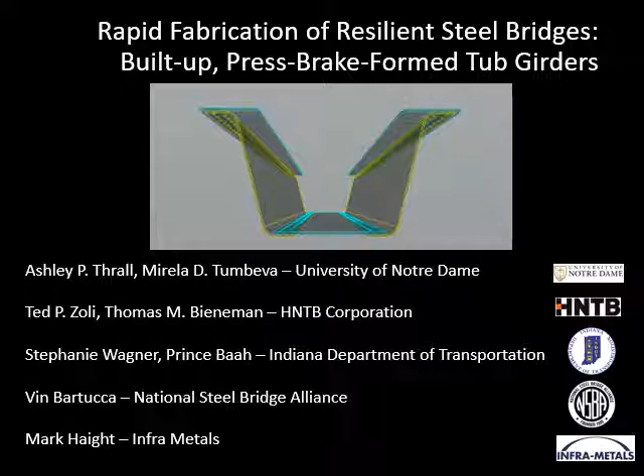My colleagues in this are Dr. Ashley Thrall at University of Notre Dame, our Indianapolis office at HNTB, including Tom Bieneman, Stephanie Wagner and Prince Baah, our Indiana DOT, they're the project sponsors, as well as Vin Bartucca from National Steel Bridge Alliance and Mark Haight from Inframetals.

When we think about accelerated bridge construction, and this is a project we were involved in developing the SHRP2 toolkit for accelerated bridge construction, a hallmark of accelerated bridge construction is doing a whole lot of work without interrupting traffic and then over a long weekend replacing bridges.

This is a corridor in I-84 in New York where we replaced two mainline bridges over a weekend. But what you don't hear about is the 10 or so months of construction it took to prepare for this weekend outage. And so we got very interested in Dr. Thrall's kinetic structures lab, in whether we could dramatically shorten the time it takes to fabricate components.

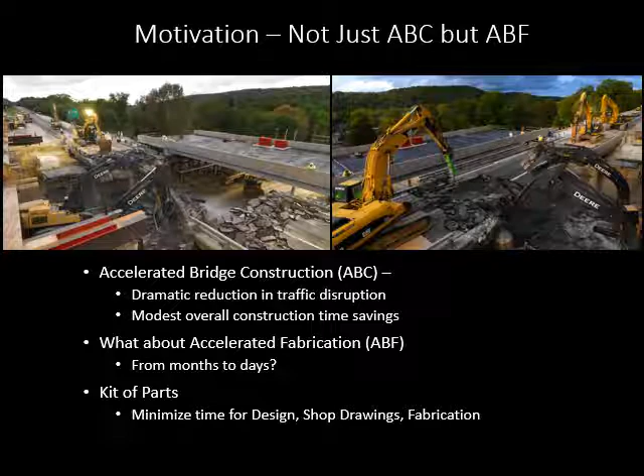So this research is all about maybe not accelerated bridge construction, but accelerated bridge fabrication. Our goal here is to take fabrication, particularly of steel girders, and instead of that taking tens of weeks or months, try to reduce that into a matter of a few days. Because we're interested in streamlining not only the fabrication process but also design and shop drawings, we're using a kit of parts approach.

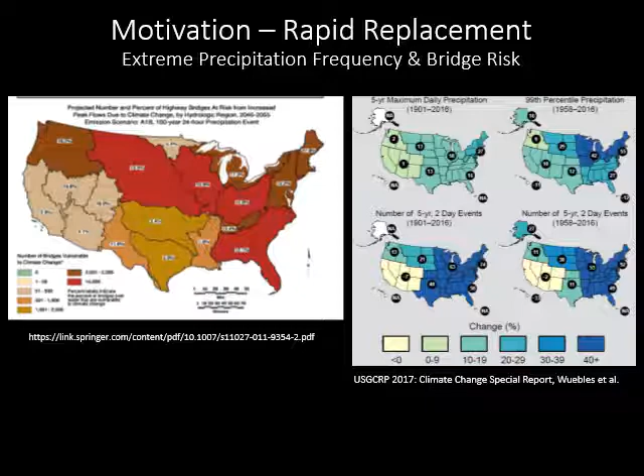In terms of motivation, if we spend some time just talking about climate change and its impact to bridges, there are significant bridges in the Northeast and Midwest part of the United States that are affected from enhanced inland flooding associated with extreme precipitation events. And the numbers are really troublesome. We see anywhere in the neighborhood of 40 to 50% increases in the last 50 years of the 1% or 2% rain events. Inland flooding has become a real problem, not just in places like Indiana where our research is being conducted, but really all throughout the Northeast.

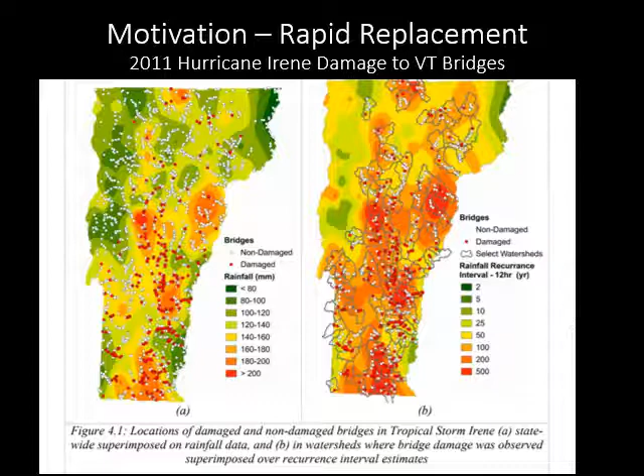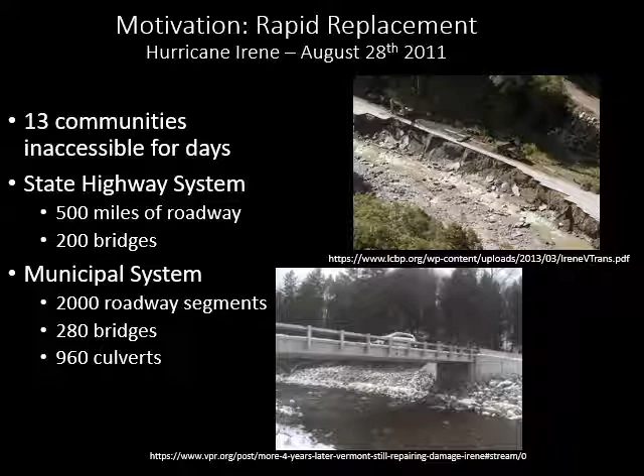So in 2016, you see the challenge that we have - many relatively modest span bridges that take us forever to replace. Can we dramatically enhance our ability to replace these bridges rapidly?

In terms of the research program that we have outlined, and we're roughly halfway through that, it's broken into two parts. One is to investigate the behavior of demonstration bridges that we both design and deploy, and the other part is to develop this design and strategy and kit of parts and a catalog for bridges so that bolted-up tub girder bridges could be used literally anywhere.

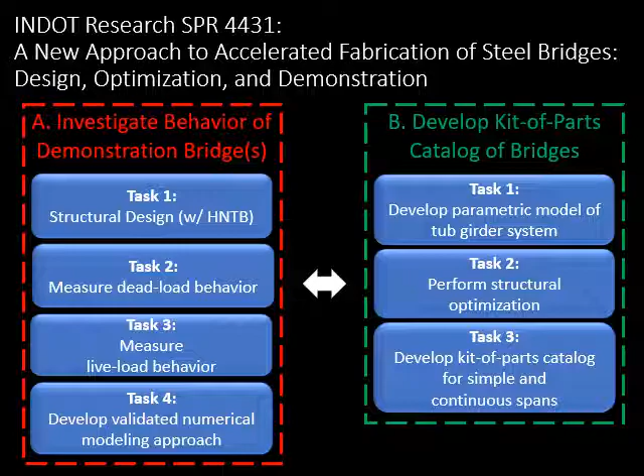So this is a joint project. HNTB is the engineer of record for these tub girder bridges, the two projects we've selected, and working together with Dr. Thrall and her grad students from Notre Dame, we're developing this kit of parts. There's also quite a bit of field work to verify and validate our design methodologies.

We owe a lot to past researchers and their work on using press brake strategies for tub girder projects. There's really two areas of work, both of which are robust, and there's been many deployments of these types of systems. There's a press brake form tub girder, which is more like what you would expect, a trapezoidal shape with a deck on top. And then there's a folded plate steel plate girder tub system, which is actually an open section, but it's - if you will - an upside down U.

Both of these systems have been deployed and are quite effective strategies for bridges with spans on or less than 60 feet, given the limitations. That's typically the maximum length of a brake press, and they're all fabricated out of mill plate. The maximum width of mill plate is typically 120 inches, and this implies span length limitations and also plate thickness limitations.

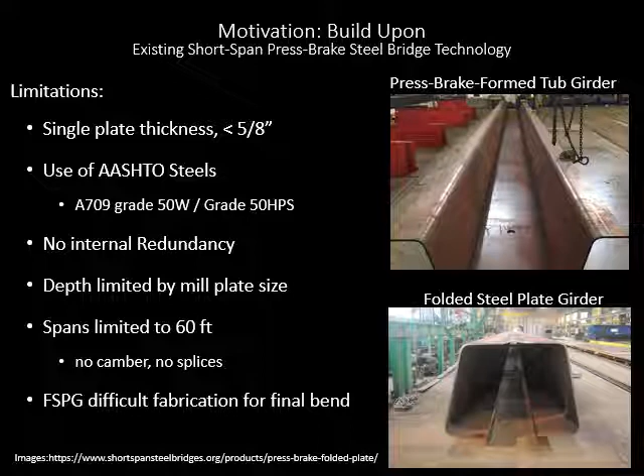Most of these bridges have plate limitations on the order of a half inch or 5/8 of an inch thick. And although that's an important span range with many bridges in it, we're interested in what's more typical of conventional plate girder span ranges, so well north of 100 feet or more.

Our built-up tub girder concept uses only press brake bent webs, and the flanges, both top and bottom, are bolted. Our strategy here is to engage with transmission pole fabricators, and this stemmed from a conversation I had with Inframetal's president Mark Haight at an NSBA conference, looking at what their skill sets were and how we could map them to the bridge problem.

By press braking the webs only, that 120 inches can turn into quite deep girders, so we can have girder depths on the order of 8 feet and span lengths approaching 300 feet. We're still limited by the press brake lengths of 40 or 60 feet, but that's a reasonable transportable segment, and we can assemble these components into longer spans if we want to erect 80-foot or 120-foot segments.

There's no problem—we're simply bolting these segments together before we erect them. So nothing unusual, just the typical sorts of erection, but this strategy keeps everything very readily transportable.

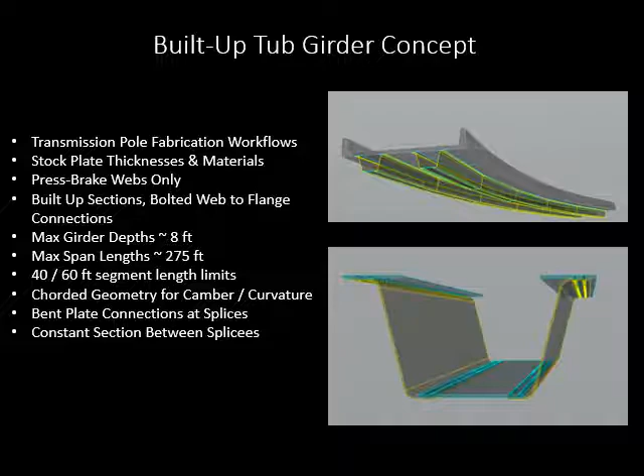We're also only changing cross-section between splices, so this 40 or 60 foot length becomes a very useful way to think about where your section size changes. So this is the strategy.

We're also taking deep advantage of research by others, particularly in terms of redundancy. Purdue has done a really fantastic job establishing how built-up sections are internally redundant. They had quite a time demonstrating even the failure mechanisms with modern steel.

This is a research program looking at bolted cover-plated girders, so you see a clip angle and that bottom flange plate with a through crack, trying to assess whether that crack would propagate into any of the adjacent components, whether it's the web or the clip angles.

They tried like hell, including cooling the entire assembly to -83 degrees to make sure they're on the lower shelf of fracture toughness, driving wedges to force the crack to propagate across the cross-section. And in no circumstances did that crack propagate into any component.

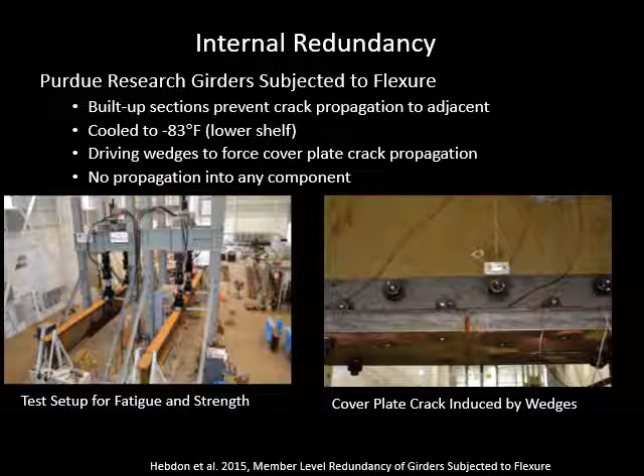This really just highlights how effective internal redundancy is as a strategy. What we did in the riveted girder days probably has a big advantage in terms of overall safety and internal redundancy. So we're taking advantage of that internal redundancy in the design of the press brake tub girders.

In addition, Eric Williamson at UT Austin, with grad students, has also done a significant amount of work looking at the system redundancy of twin tub girder bridges. This is another case of trying everything you could to get these systems to fail.

Not only was the bottom flange cut explosively, which did very little—I think it was 1-inch deflection—but he then cut the webs and supported the span with simulated live load above it, then explosively cut the supports to try to get fracture to propagate. Even then, he got very little deflection, I think 7 inches, but it was fully capable of supporting live load.

It took statically adding 5 times the legal load limit of 363 kips on the bridge to get it to fail. So this just shows you that tub girders, even twin girder systems which we might consider fracture critical, are incredibly capable of load redistribution and redundant behavior.

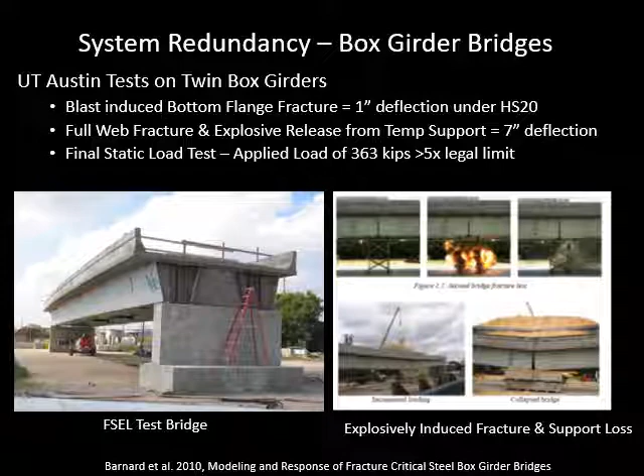So tub girders for us are really a natural choice to get very cost-effective and safe, redundant structural systems. As I mentioned, we've done work in bolted plate connections and bend plate connections.

This was work also done under Dr. Thrall, looking at bolted connections with angle breaks, and you get the idea with chorded sections, whether vertically chorded to get profile or chorded in plan to get curved girder behavior.

Bend plate connections are an important consideration. This work by Evan Gerbo really demonstrated how effective these connections can be and looked in great detail at the behavior of the bend plates themselves. Bend plates are obviously an issue here with using bend plate webs as well as bend plate connections.

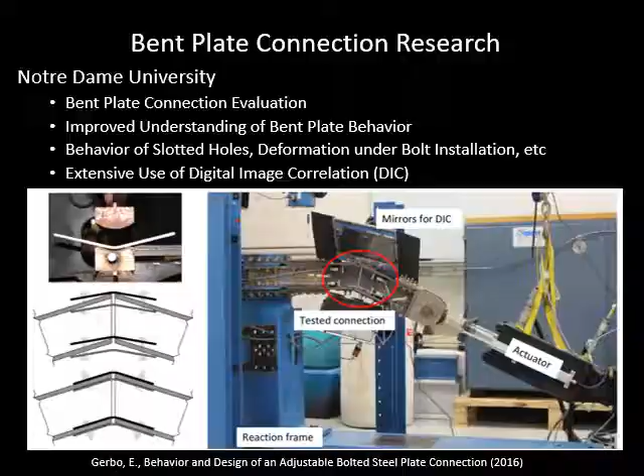So I'll spend a little time talking about plate bending. This is typical press brake bending work, and we've done quite a bit to assess what is happening with the steel from flat plate to bend plate.

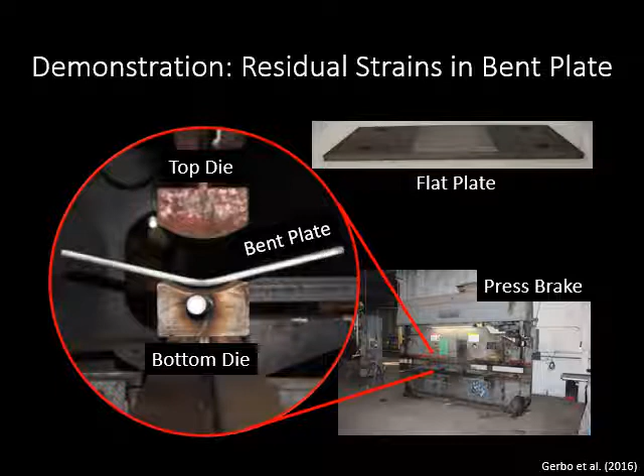In this research, we used digital image correlation. By etching the plate with a pattern, with digital image correlation, which is essentially stereoscopic with two cameras collecting two images, those images are put back together to get 3-dimensional behavior. By patterning each plate, we can accurately calculate the differences between points and then back calculate strains.

So you're seeing here on the left the comparison of digital image correlation of an actual bend plate as compared to a finite element simulation, and obviously we're looking here at plastic strains. We started this program thinking we could use strain gauges, but their ability to survive the press brake was a concern, and we really validated the value of digital image correlation to understand behavior of bend plates.

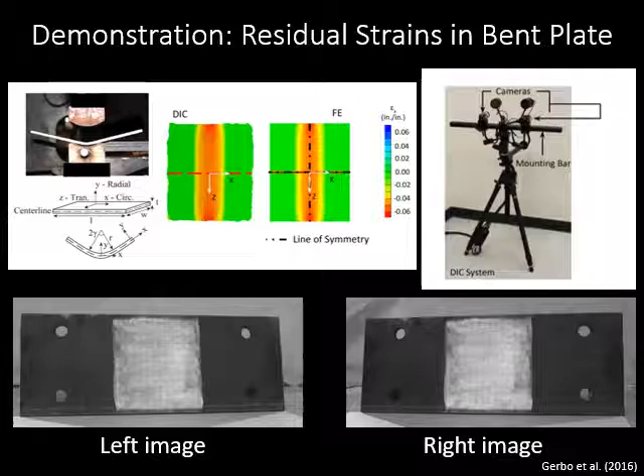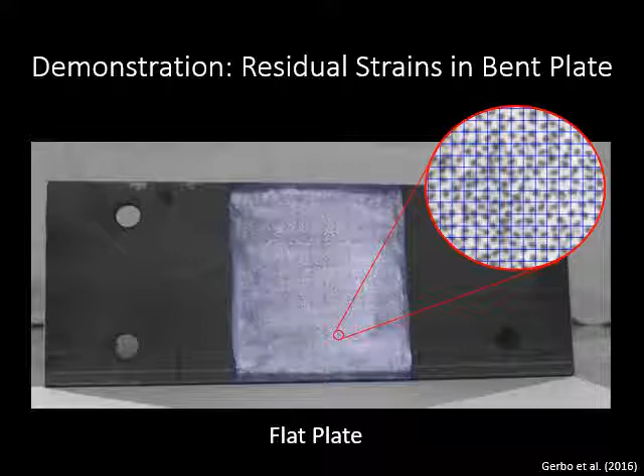This is a close-up of what that image looks like, and the patterning becomes important. So we're either using ellipses that are randomly generated or using squiggles, and we've used this on other projects to be quite effective. These patterns, because they're randomized, let the software tell relative displacement, at the pixel level, from one pixel to the next.

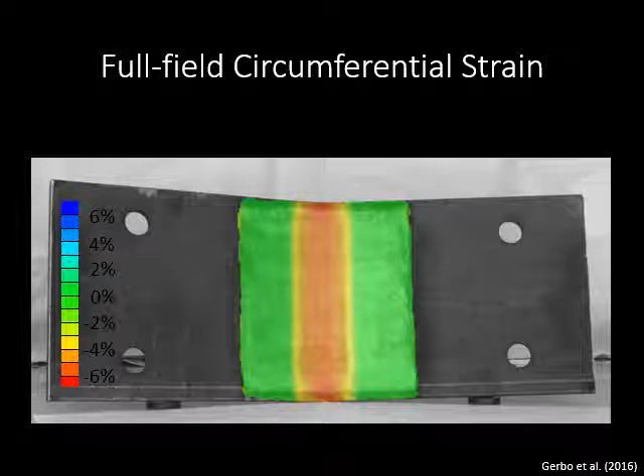So this is an image of the strain profiles as overlaid on the actual bend plate, and you can see fairly significant plastic strains, which are well predicted by equations. We've even accounted for a neutral axis shift and have a pretty good understanding of the way plate bending works with press brakes and what that does in terms of introducing strains into the steels.

We've also taken that digital image correlation on the road and have developed patterning for stickers and applied them to painted steel bridges, demonstrating that it's quite an effective technique in the field.

On the upper left is a truss bridge that had a chord fracture where we used digital image correlation. The right hand one is a cable stay bridge where we can not only see stress profiles but calculate principal strains, getting a sort of finite element overlay of strains over quite a complex system. This is near the tie down of an end floor beam of a cable stay bridge.

And then quite a comprehensive bit of work done for Indiana DOT on the behavior of impacted girders. This is looking at load shedding when an outside girder has been impacted and you get flange deformation, and you've now loaded it with trucks. Where does the load go? Does it go to the interior girders? How much stays in the fascia girder, and does the fascia girder need to be repaired?

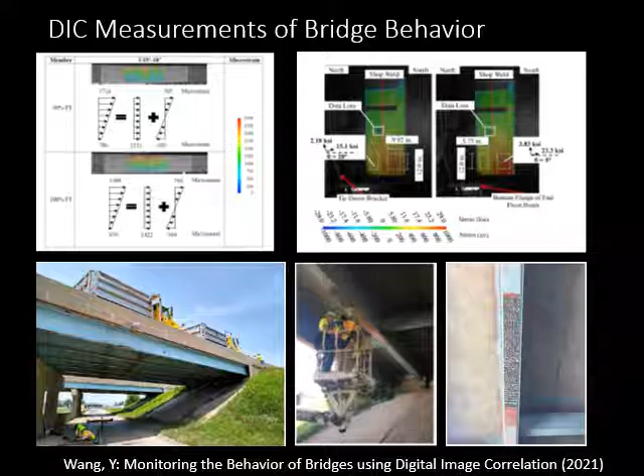All of that technology of using digital image correlation, we're planning to use on our deployed bridges to measure not just behavior under live load, but also behavior under dead load. We will pattern and take photographs of the bridges prior to their being erected, so we'll get what I think will be for the first time both dead load and live load behavior.

Now a bit about those two bridges that are our demonstration projects. One is replacing a 3-span continuous bridge with a 2-span continuous. We want to demonstrate with our technology that we can do continuous systems, and the longest span here is over 100 feet, 105 foot, and 86 feet.

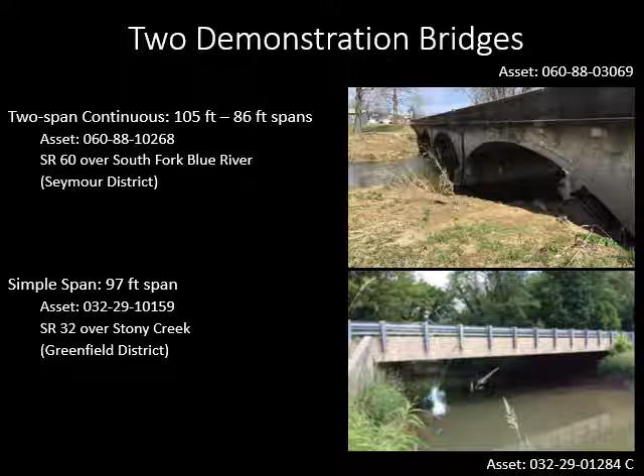And for a simple span bridge, which has, I think, the original bridge about a 72-foot span, we're extending that to 97 feet just to get better hydraulic opening and better abutment behavior. So that's a simple span bridge at nearly 100 feet.

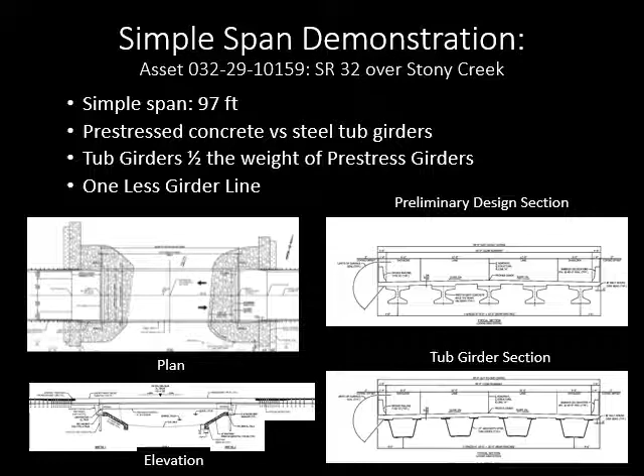So to do a little comparison of before and after, the conceptual design for the bridge was pre-stressed girders. This is a 5-girder system for the simple span, and we're replacing that. Our alternative with tub girders uses a 4-girder cross section, and the girder depths are roughly the same. These are quite shallow depth tub girders, using basically 1-inch steel flanges and 5/8 inch steel press brake bent webs.

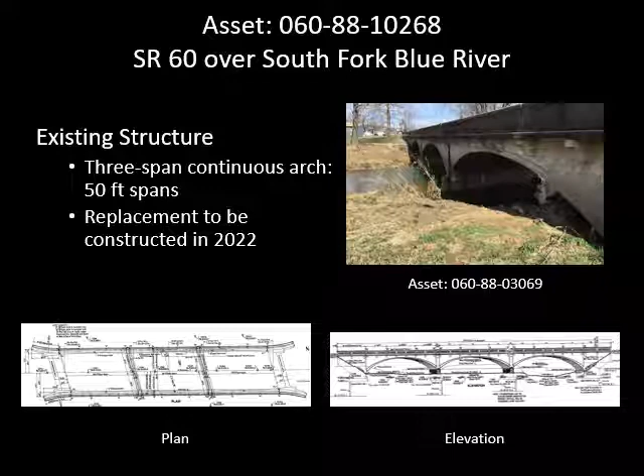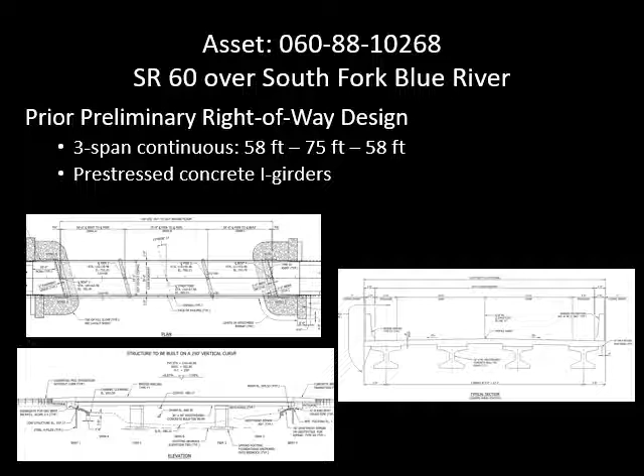For the 3-span continuous, the big advantage of going to tub girders is that we can actually reduce the number of spans. The preliminary design for this was still a 3-span bridge with pre-stressed girders, and our approach is to actually eliminate one of the substructures and reorient so that we have a 2-span continuous, going to tub girders. Now we've eliminated a substructure unit, which is a big advantage because this is also one that's subject to debris accumulation.

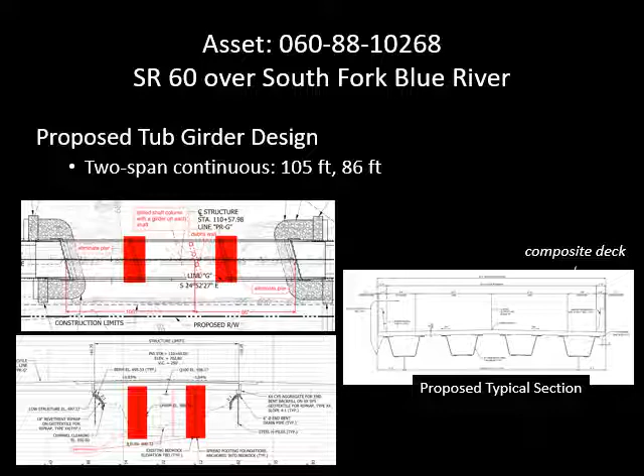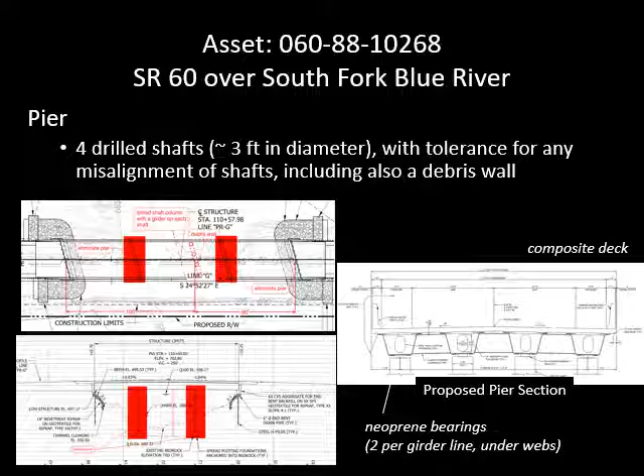So we've got better hydraulic opening, less construction costs associated with substructures, and easier erection. Our proposed substructure is just the extended drilled shafts with shear walls supporting each tub.

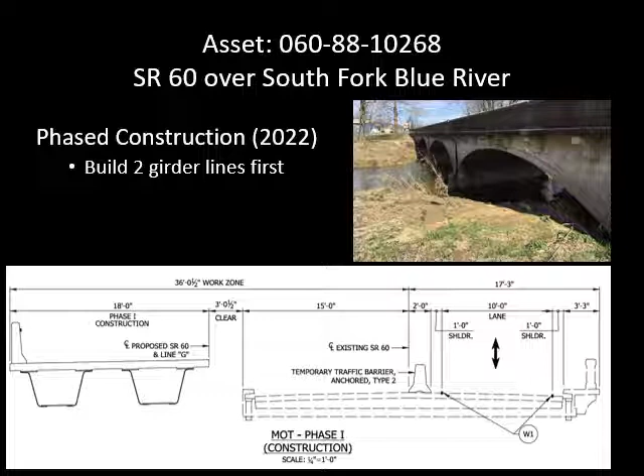This is also staged construction, as many projects are. The construction staging is to build and shift traffic one lane at a time to the new bridge, built in halves. We also want to demonstrate that this technology works in staged construction. Because these are infill arches, for demolition we've left 3 foot clear to make sure that demolition of the existing bridge doesn't get fouled by the new bridge.

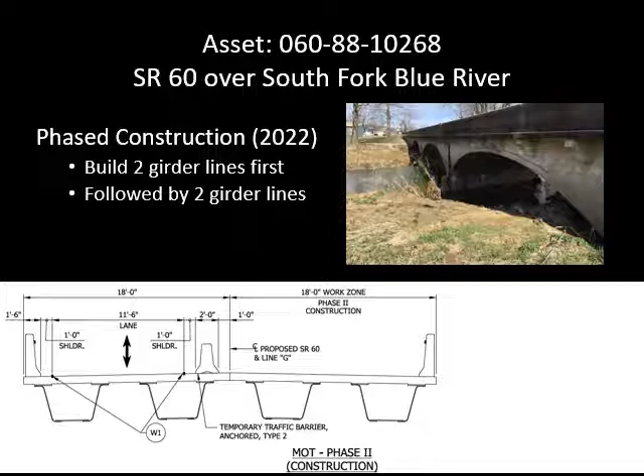So we've got a work zone for complete demolition, and then the second phase construction is connecting the identical span with a longitudinal joint. So as part of this evaluation, we'll also be able to look at load distribution and redistribution through stage construction, which will be quite useful.

The big takeaway here is not just the savings of a pier, but the significant savings associated with lifting activities. The tub girder is roughly half the weight of a similar pre-stressed girder for similar span lengths. So there's a big advantage both by pier elimination, and we've significantly reduced not just the weight of the picks.

We've gone from a 36-ton pick with a 3-span continuous at a 100-foot radius to a less than 30-ton pick at a 50-foot radius. So significant reductions in crane activities, with cranes placed behind the abutment, as well as a reduction in the number of picks. So we see big advantages to transport and erection associated with going to tub girders, and pier elimination is obviously an advantage.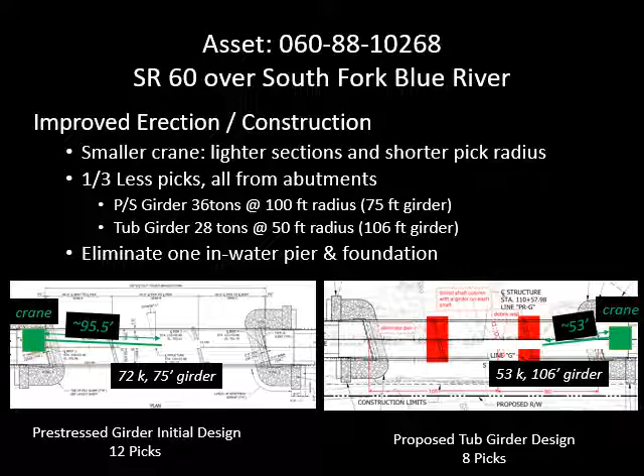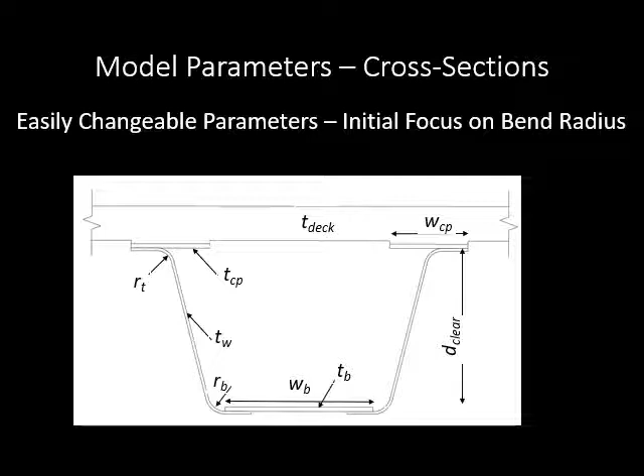As part of the research, in this kit of parts idea, we've developed parameterized models all within Abaqus. Every one of these parameters is something we can change with respect to each individual girder, and also girder spacing, deck thickness, and so on. So the idea is to have a fully parameterized set of FEM models, and then we can do parameter optimization for this development of a kit of parts.

I want to spend a moment talking about press brake bent systems. We're using a press brake to bend steel, and that whole question about what steel should we use and what bending does to steel. So this will be a little bit of an aside.

Part of our motivation was to use workflows associated with transmission pole manufacturing. The more we got into this, with the help of Mark Hayden at Inframetals and some of his staff, we got a better understanding of what steels they use and why, and how they might be a deep advantage for using those steels for our tub girder project.

In particular, they're typically using 65 KSI steels, ASTM A572 grade 65, which is a bridge steel they also use, that's typically galvanized. ASTM 871 is a pole steel that is typically a weathering grade. So there's both weathering grade and normal grade steels that we would be familiar with.

What's fascinating is that their CVNs are specified similarly, 15 foot-pounds, which we would typically specify at 40 degrees Fahrenheit. They're specifying at minus 20 degrees Fahrenheit. It turns out that specifying a minimum Charpy at a much lower temperature is really the right strategy when you're looking at cold working.

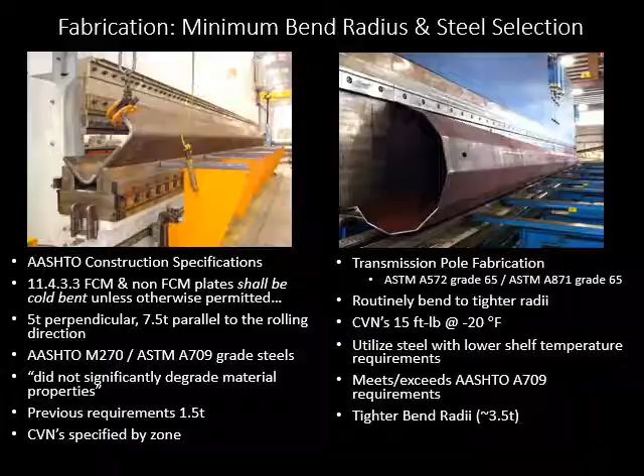So if we talk a little bit about why temperature shift is the right strategy, going back to why we use CVNs, or Charpy V-notch, to get an assessment of toughness — our goal is to make sure that at the operating temperature we're using the steels, we have adequate toughness against crack propagation.

So typically we're testing at lower temperatures, and we're using as a design basis the temperature, the in-service temperature, the lowest in-service temperature.

So for these projects in Indiana and for the Northeast, we're typically talking about Zone 2 Charpy requirements.

This temperature shift not only applies to cold working, as you see in the right-hand graph, but also applies to the toughness of steels depending on loading rate. So this idea of having lower temperature toughness inoculates you against some cold working and also some dynamic force, because the Charpy V-notch is a dynamic test, and typical bridge behavior in terms of strain rates is in the intermediate range, maybe even closer to static. So this 40 foot-pound, the 15 foot-pounds at 40 degrees Fahrenheit has associated with that taking advantage of the fact that we're testing dynamically, and the bridge actually uses more intermediate strain rates, or statically.

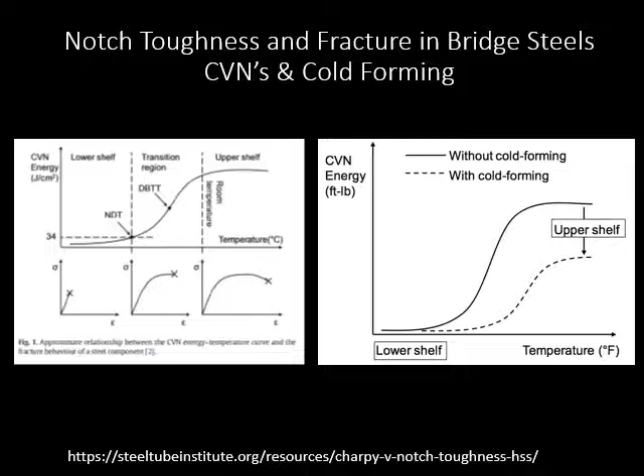So one of the arguments, and this maybe even applies to AASHTO, is that when we cold work steels, we really should be starting with steels that have higher toughness, and not just higher toughness at an operating temperature, but it's better to have higher toughness at lower temperatures because of this temperature shift.

So we've learned a lot about this sort of behavior from roll form structures like steel tubes. HSS, whether rectangular or square tubes, have this problem of a bend radius in the corner, and then typically a weld. These are typically formed by roll forming, and here you see the same temperature shift.

The Eurocode uses a temperature shift as an approach to evaluating the toughness of cold worked steel, and they don't specify cold working, but cold worked steel. Here these are CVNs where the flat is not cold worked on a rectangular or square section, the corner is cold worked, and the black and the red are the difference between the two.

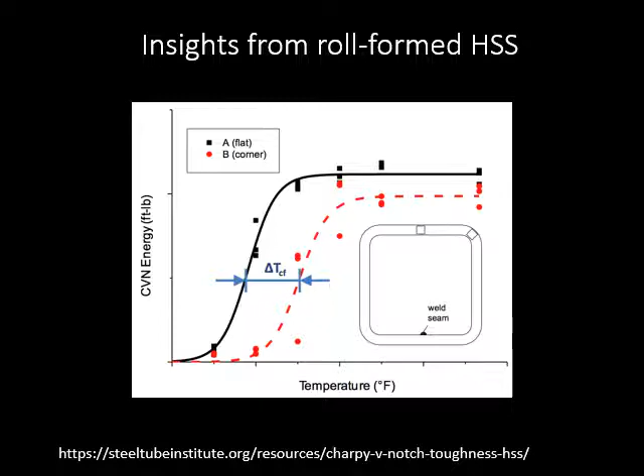So I'm using the same philosophy. We want to start with better toughness so that when we take a temperature shift into account, we end up with better toughness, or with adequate toughness, of the finished product.

In the Eurocode, they use this degree of cold forming, which is associated with plastic strain, but slightly modified. You can see a great correlation with the degree of cold forming. So no cold forming, you start with really good toughness, and as you cold form and strain the steel more plastically, you get reductions in toughness. The idea here is lower strain, less reduction in toughness.

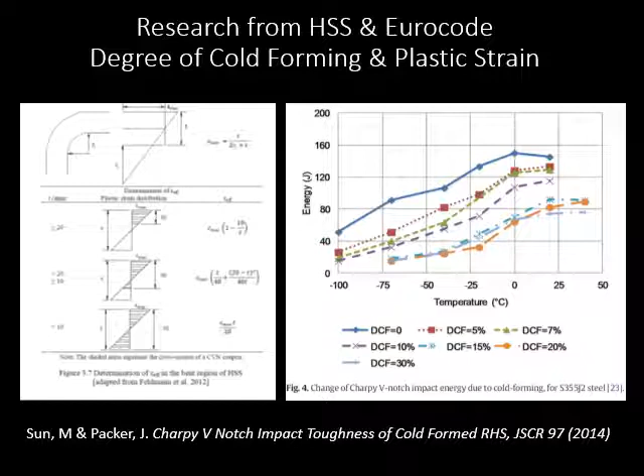So bigger bend radiuses are helpful. But you could also get at the success by starting with better toughness material in the beginning.

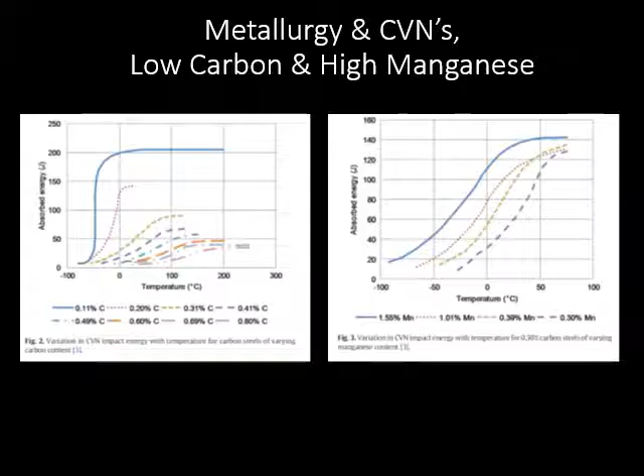That's where I want to head to next. So it turns out also that the lower the carbon content and the higher the manganese content tends to head you in a place where you start with better toughness at colder temperatures. And so the steels developed for the transmission pole business tend to have lower carbon and higher manganese contents.

This is a typical example when we asked Inframetals for a typical example of 5/8 inch plate that we're going to use for our projects. This is what we see. We see CVNs of an average of 100, so 15 would be the minimum at minus 20 degrees Fahrenheit. And if we go through and compare...

Pole steel and this 5T temperature shift, which is permitted by AASHTO, and we compare what we're getting, even meeting the minimums, we find that bending to a tighter radius, this 3.5T, which is typically used in transmission pole fabrication, we're very comfortable. We can meet the AASHTO requirements assuming no cold working.

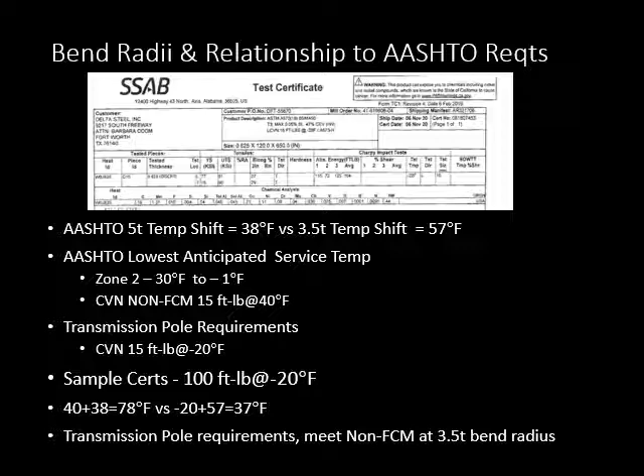So our approach here is, rather than using what I would say are A709 grade 50 materials, to use transmission pole manufacturing materials which are on hand as the basis, and bending them to dies that are typically used in transmission pole fabrication to make sure that we meet our minimum toughness requirements. And we think that this is the right strategy. We're really trying to adapt workflows from transmission pole manufacturers to get new fabricators into the market.

So these are the ASTM A871, which is not a steel we use in bridges, has exactly this 15 foot-pounds at minus 20. And it's interesting, when they use A572 grade 65, which is a steel that doesn't have an ASTM minimum CVN, when they use it for poles, they specify the same absorbed energy. So that's exactly the strategy we have, is to specify minus 20, 15 foot-pounds at minus 20, as the grade of steel or the characteristics of steel we need for our press brake webs.

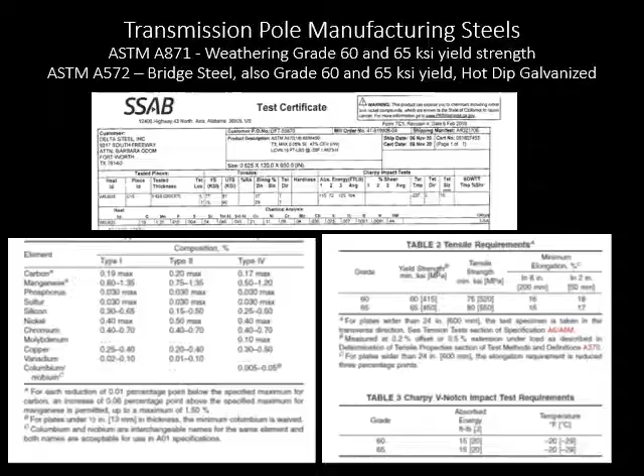Now a bit about the modeling.

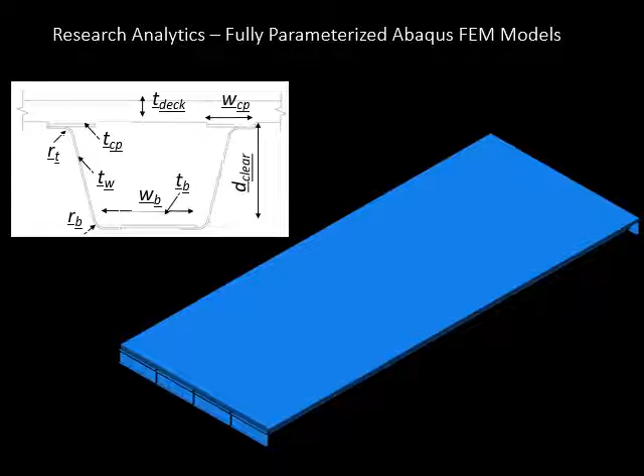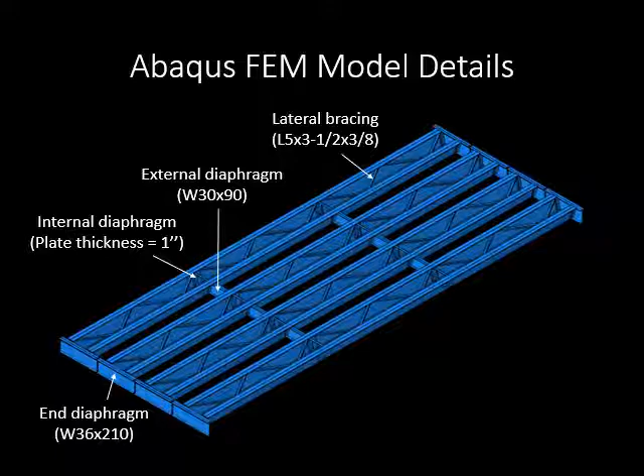As I mentioned, we have everything parameterized. This is some details of the simple span, the 97-foot simple span bridge model. In Abaqus, we have pretty well everything modeled in quite a bit of detail: lateral bracing as angles, connections, end diaphragms, intermediate diaphragms with the openings, even openings in the bottom flange for construction access. Much more sophisticated than what we would do in a typical design office, where in this case we're using CSI Bridge and their

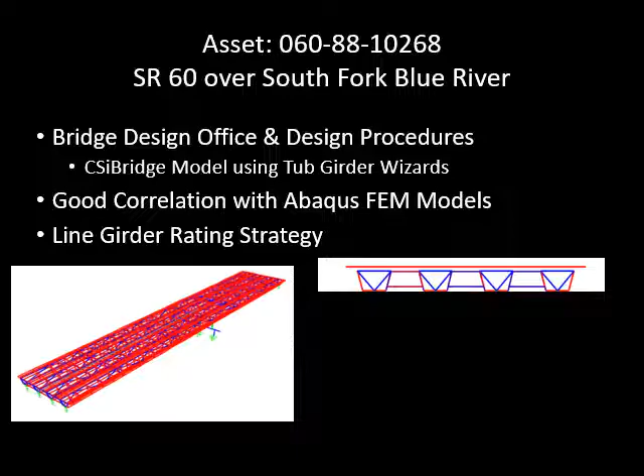tub girder wizard, which we found quite good correlation. So the Abaqus models give us much more detailed assessment of some of the components, but we want to make sure that a typical design office workflow can handle the design of press brake tub girders.

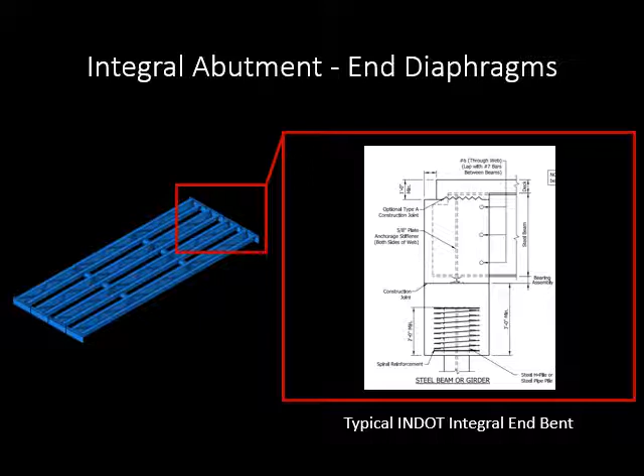Also, we're using Indiana DOT's semi-integral end bent conditions, so we've adapted some of our details to avoid joints and use conventional semi-integral abutment type connections that are common in Indiana.

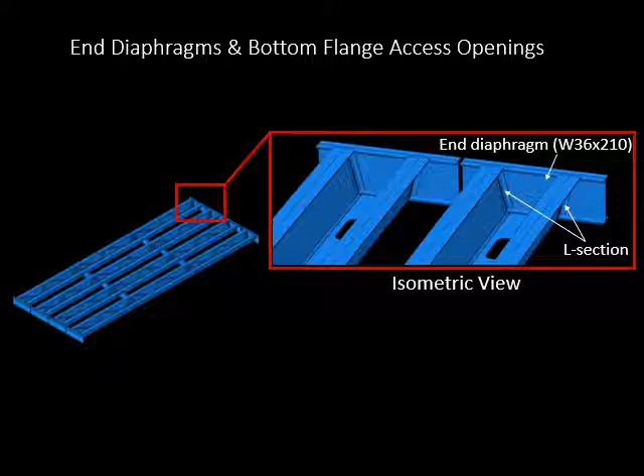As part of this system, there are no welds on anything other than the shear stud welding at the end. We're using all bolted-up clip angle connections and diaphragms, using rolled sections, including for the intermediate diaphragms.

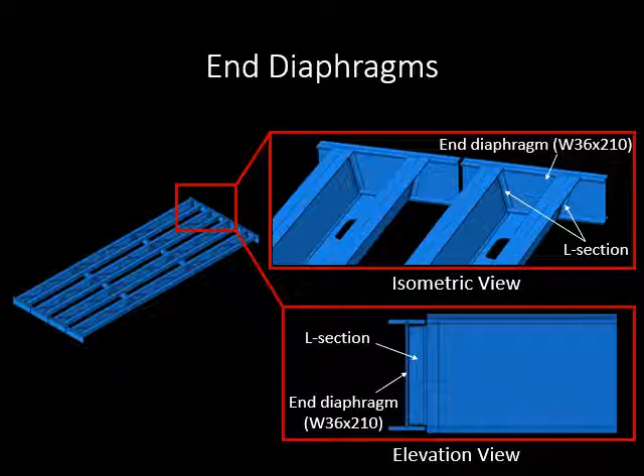And we're coping the web, because typical transmission pole manufacturers have sophisticated burn tables, we can drill the holes for the connections as well as cope flanges or cope webs prior to bending. So all of this would be done on a flat burn table prior to bending, and then the bent product would come out ready for installation.

As I mentioned, internal diaphragms are an important consideration. So we've got both a rolled section, a full depth or nearly full depth diaphragm, but we're also, in order to provide continuous access to the inside of the tub girder, using diaphragms with significant cutouts.

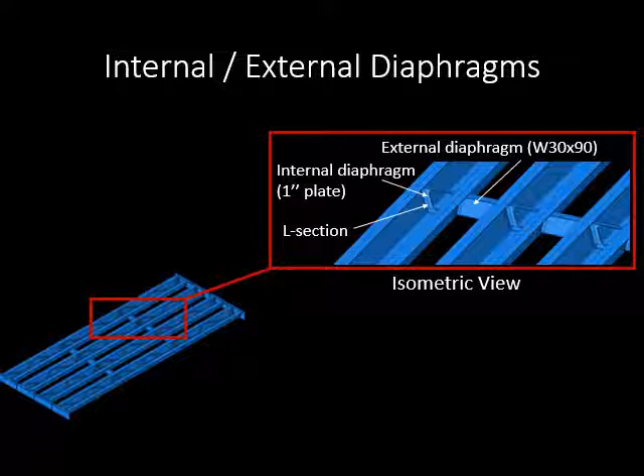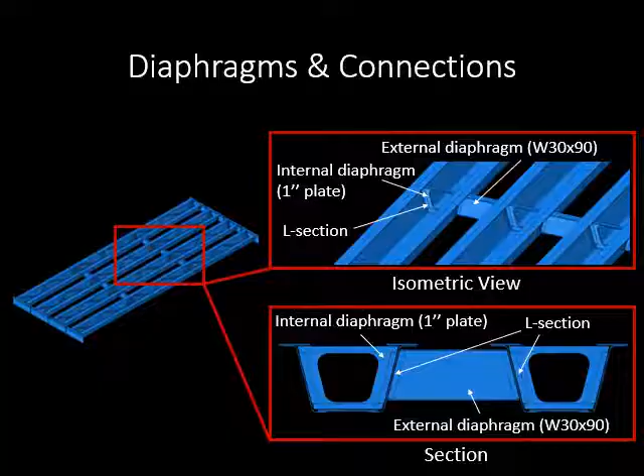Those diaphragms are an important consideration, and because we're roughly a little bit more than 36 inches deep, we spent a lot of time looking at this. We're not expecting, because these are internally redundant and system redundant members, the need for inside inspection, but we didn't want to preclude inside the box inspection. So we did quite a bit of work on diaphragms and diaphragm sizes.

In terms of diaphragm opening requirements, most states have standards that are not necessarily easy to meet given shallow depth girders like we're looking at for these demonstration projects. Both AASHTO and OSHA don't have explicit requirements for bridge inspection. But what we did find was some documentation in the building code, both IBC and IRC, for minimum requirements for emergency egress: 24 inches minimum height, 20 inches minimum width, and a cross-sectional area of 5.7 square feet, which makes a lot of sense.

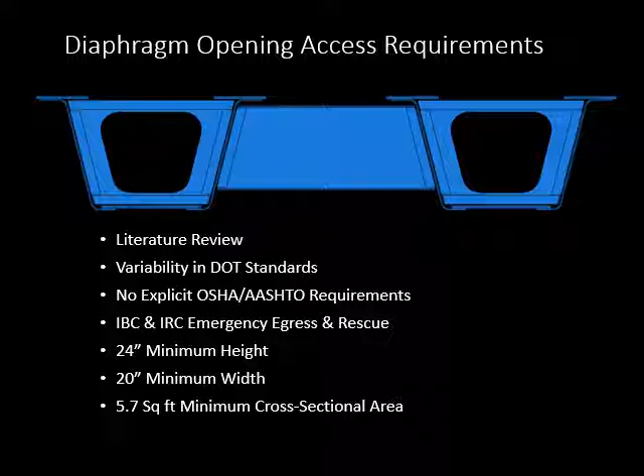So all of the openings that we've developed for our tub girder projects meet these IBC and IRC emergency egress and rescue requirements. We're also explicitly modeling the openings and the opening geometry just to make sure the stress state doesn't have any issues.

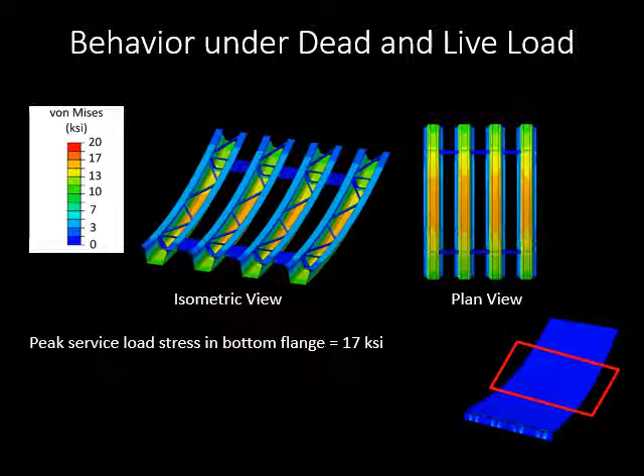This is dead plus live load, so we're really not working any of this steel very hard. Just to give you context, these are 5/8 inch webs, 1 inch plates. The top flange is 18 inches wide, the bottom flange is 34 inches wide. We're at service load levels for 50 KSI steel, and remember the webs are 65 KSI steel. We're working at 17 KSI, so we have plenty of residual capacity.

If we separate the elements, we see that the bend in the girder web doesn't produce any localized stresses. The stresses in the girder web follow the bottom flange section, and the top flange the same. We obviously, in this case, have a higher strength, higher yield strength web than flanges, not intentionally, but because we can. So if you think about it in that context, we're really not working the webs very hard at all.

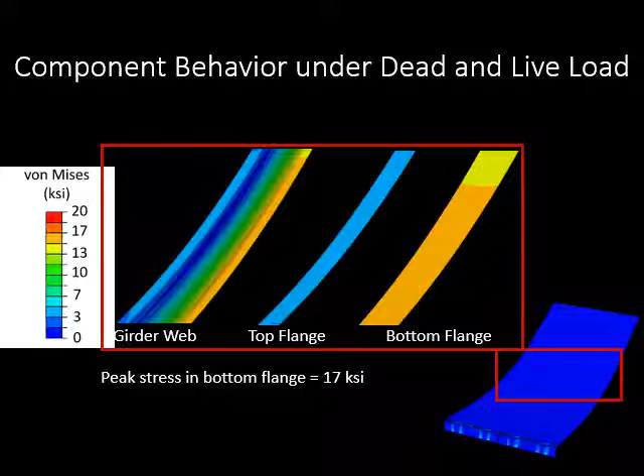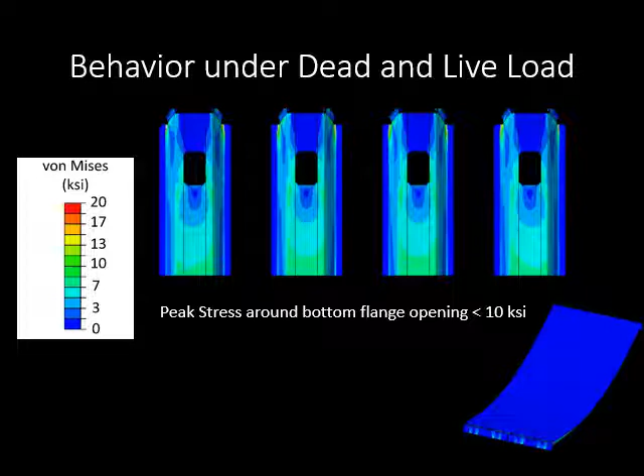Also, these FEM models, the Abaqus models, allow us to look at the stresses around openings. So we have an access opening in the bottom flange, and it's one of the things that set the minimum width of our bottom flange, to make sure that we had an adequate opening to allow for inspection access. And this is obviously near the support.

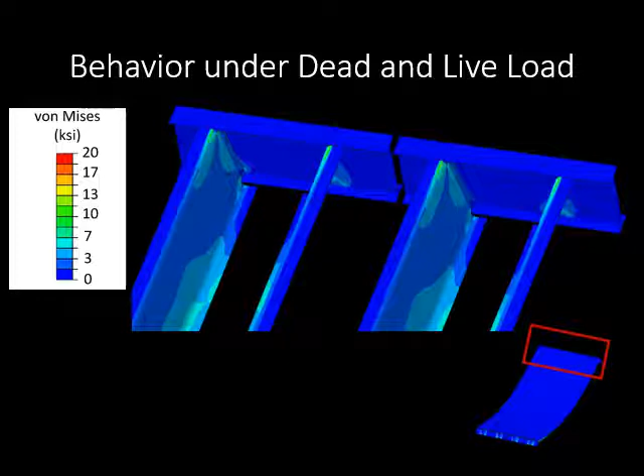Even looking at the stresses around the copes, this is just under localized load. So this is wheel load near the maximum bearing reactions and shear demands. We are seeing very, very low stresses, whether it's in the flat part of the web or the bend radius part of the web, well below the mid-span stresses for a 100-foot simply supported girder bridge.

From a fatigue perspective, remembering that we're only a bolted connection, we would have a fatigue stress range of 16 KSI, and we're less than a third of that, even in the web peak under live load, under truck only. And this is not the fatigue truck—this is the full truckload.

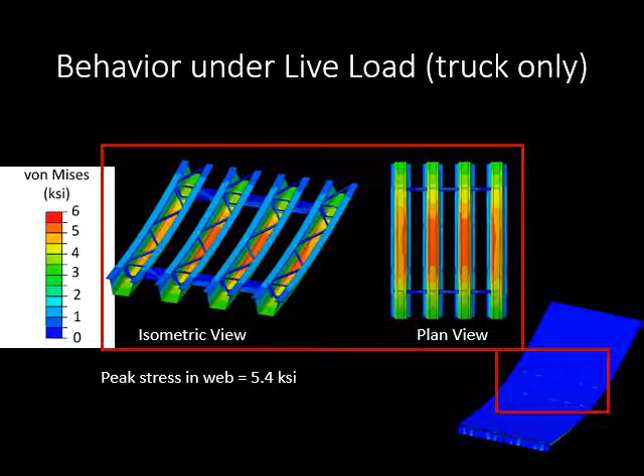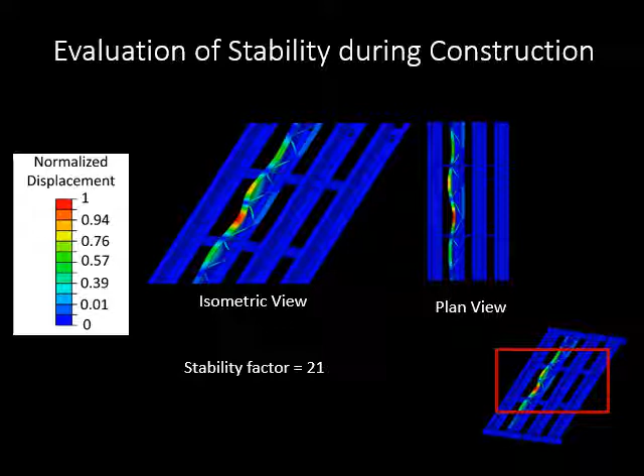So great fatigue performance, as you might expect in these systems. And then we've even evaluated the buckling behavior of the flange arrangements—a little unusual. We looked at local buckling during concrete pouring, and found very large factors of safety in terms of buckling stability. So we're doing the construction evaluations in a very detailed way.

Nothing surprising here, but also very robust behavior. So, I'm getting close to wrapping up here. We're approximately midway through our research program.

The simple span bridge design is complete and it's out to bid. The anticipated construction schedule is on the order of summertime next year. So the follow-on work we have to do—to validate using digital image correlation the behavior of these tub girder bridges and make sure our models are accurately predicting behavior—will happen at that time. We'll be out there during construction, both prior to the bridge being installed and after, both prior to concreting and following concreting, and then under live load.

So that we can get a really good sense of the behavior. The two-span bridge is currently under final design. Design is expected to be complete in about a month, and that will go out to bid shortly thereafter. We expect construction of the plate girder sections in the field in the late summer of next year. So next year we'll be quite busy evaluating the performance of these components.

We see a lot of promise to this, but particularly promise in terms of future work looking at much longer spans. I think there's nothing that stops us from going to spans on the order of 250 to 300 feet using this technology. And that will be covered in our kit of parts.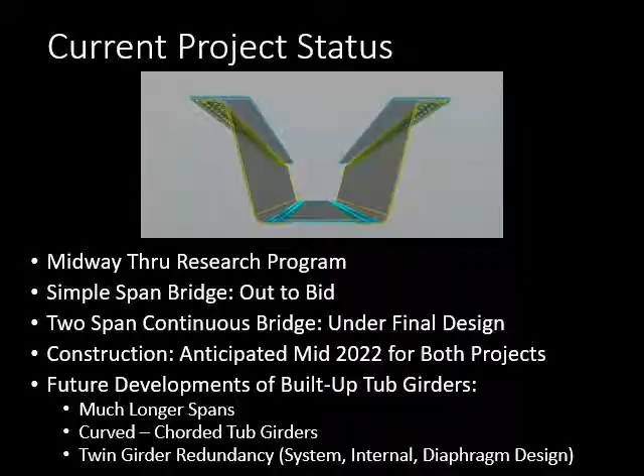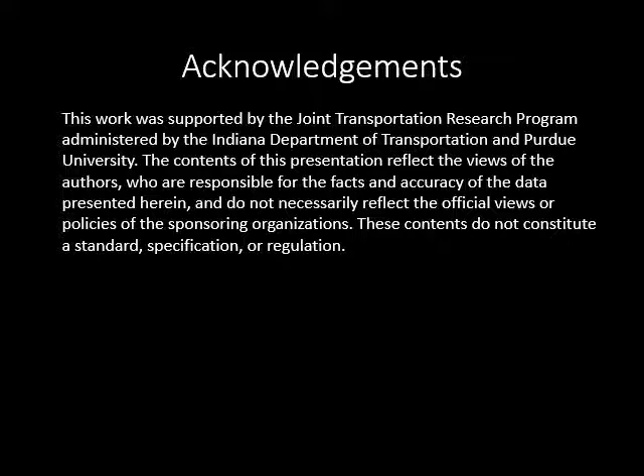I'd just like to acknowledge that this work is being done as part of the Joint Transportation Research Program under Indiana DOT and Purdue University, and the usual provisions apply that this represents our work and not the work of these other organizations. Finally, I want to acknowledge again Stephanie Wagner at INDOT, who has been a great, not just business owner, but real partner in this. We've enjoyed our work with Indiana DOT and are looking forward to getting these bridges installed and evaluating their behavior.

And we've also taken great advantage of our advisory committee that includes Vin Bartuka, Pat Connor, Jen Hard, and others, and quite a group from Indiana DOT, as well as Jose Ortiz from Federal Highway. So we've learned quite a lot from their leadership and input, and expect to learn more over the next year or two.

With that, I appreciate your attention and look forward to answering any questions you may have.